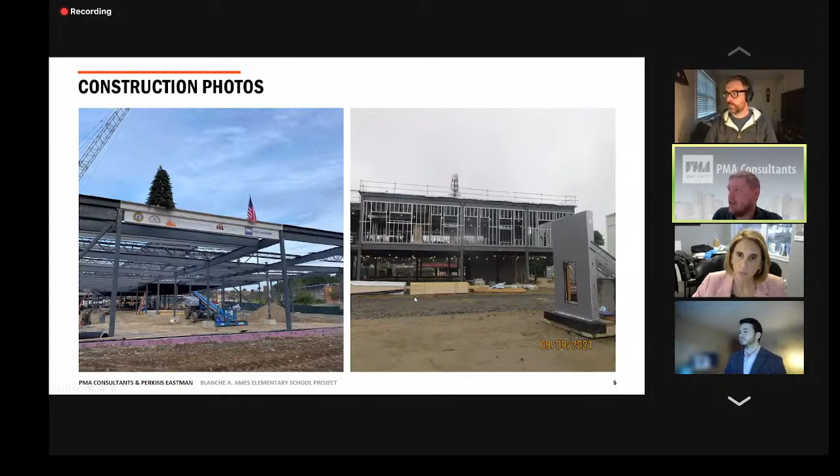On the right you'll see a picture of the most progressed building, what we call Building E, the southwest corner, where the pre-K on the first floor will be held. You'll see the exterior metal framing starting to go up, openings for the large horizontal windows, and on the right-hand side, the beginning of the mock-up wall, where the contractor puts together pieces of the building to see all the connections and make sure the details work together before going on the building.

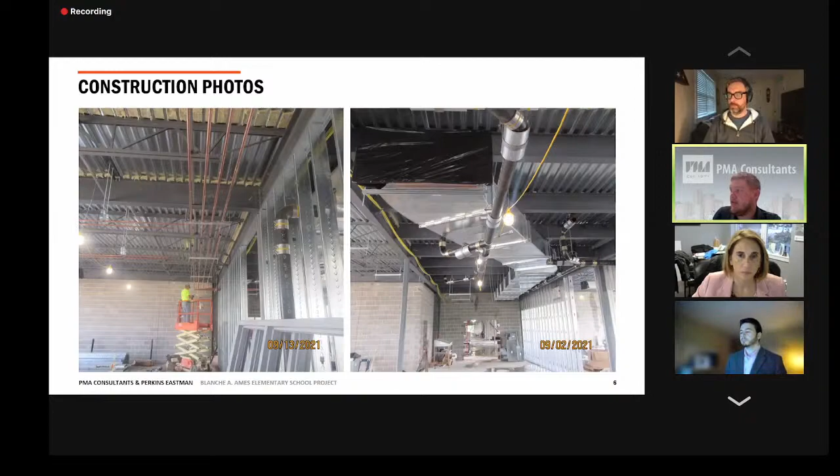Moving into the building, this is standing in E building. You'll see hot and cold water piping for the mechanical units traveling around the second floor. You also see the ductwork and roof drain piping - the large ductwork on the right, and the roof drain piping taking all the water collected on the roof through the drains into our underground infiltration systems located around the building.

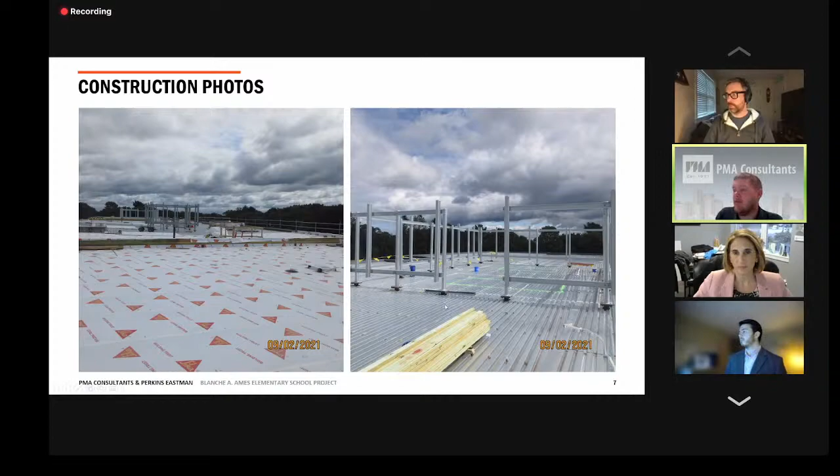These are just filtering the water to the roof drain piping you saw. You'll see in both pictures some framing - that's actually our mechanical screens. We'll have exterior panels around those covering the mechanical screen, easing what I like to call an eyesore of seeing the mechanical units. Some people like to see them, but they'll be hidden, and they'll also help reduce the noise level from those units.

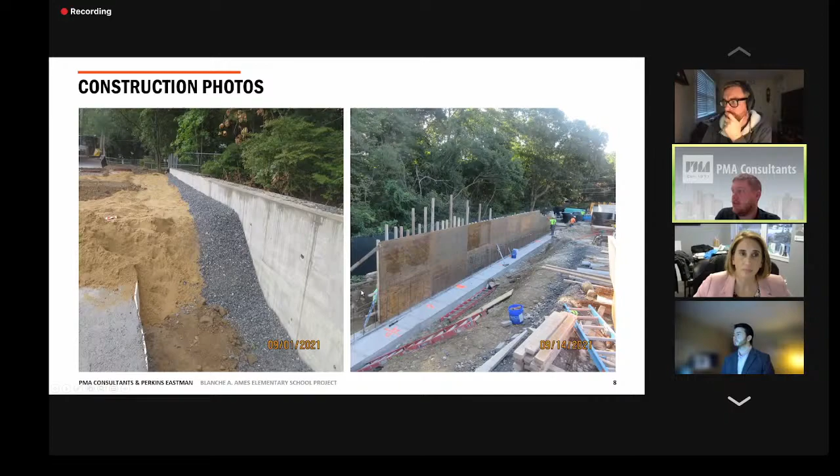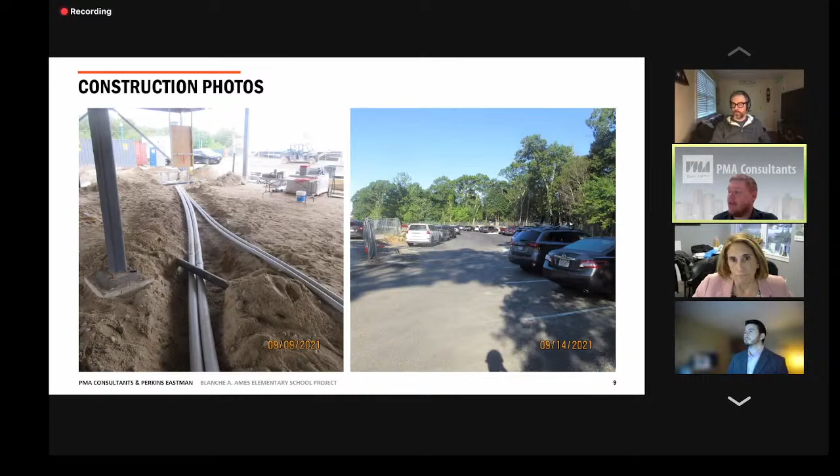On the right-hand side, you'll see the new and improved parking lot, one of the parking areas being utilized right now by the Parkview School. It's full, in use every day. It has binder and a final coat on it, and is in use and line striped, and has been working great.

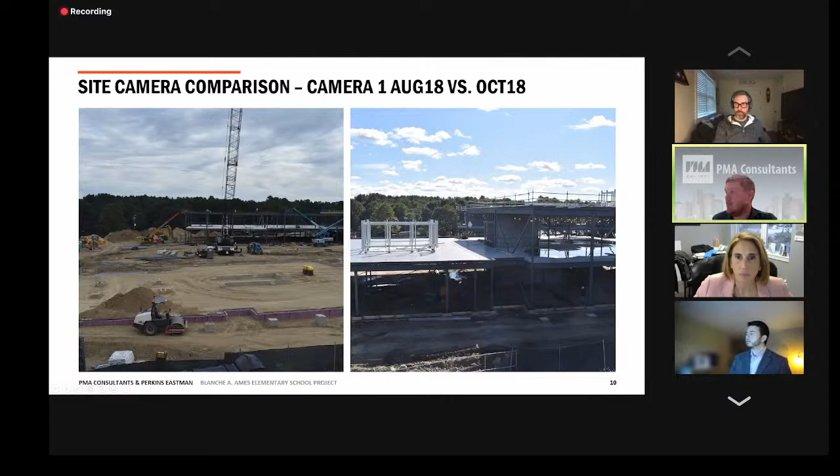That is where the central admin would be housed. On the left-hand side, you'll see C building, which you can see in the previous picture - no concrete poured anywhere. On the right-hand side, you'll see slabs on deck on both the second floor and slab on grade on the first floor, so making a lot of progress there. I believe we're working backwards towards B building, further away up in that picture, and that was actually poured today.

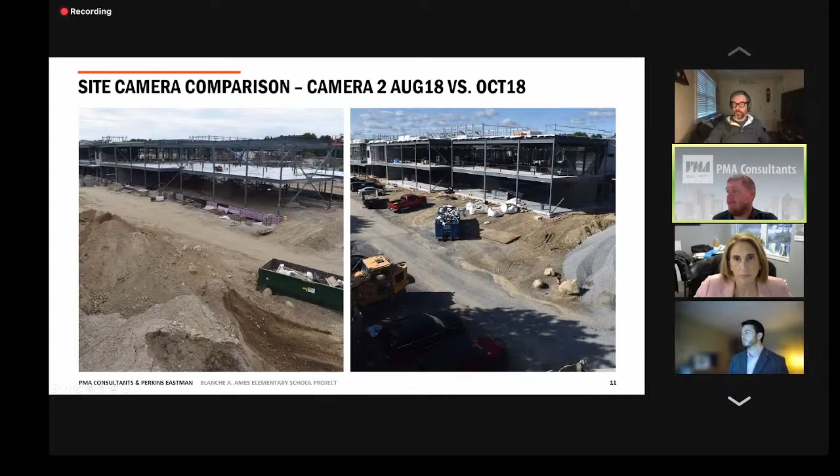The final camera comparison angle is B building, and you can see that the sheathing has progressed. Those are all the punch-outs for the windows, so a lot of natural light getting into the building. Moving right around the building, you can see the safety rails up on top for safe roof access, and the site is just getting extremely busy right now. The guys in the picture are actually working on blocking out for those window openings.

I believe that is the construction progress update. Happy to take any questions if anyone has any on the construction.

Just if you have questions, just talk, because I can't see everyone - both of my screens are taken up. Sorry.

Walter, how are we doing on the schedule? I assume we're okay. Yep, so right now PMA just completed our September schedule update, and that was dated October 1st. So it was the September schedule update, dated October 1st.

Chad, correct me if I'm wrong - the schedule went back accepted with some conditions. We did see a little bit of slippage, but that did not mean there was any slippage as to the substantial completion date. Brait has been targeting an earlier substantial completion date - internally, a lot of contractors do that. But the substantial completion date of October 14th for the building for phase 1 is still on schedule.

Chad, anything to add on that? Sure, they're still tracking early on substantial completion. They're a couple months early, but not as early as they once were. When they first submitted their schedule, they were looking at a June substantial completion - they're a bit later than that now. So I think the hope Brait had for completion next summer is dwindling, if not gone, but we're still in good shape as far as the contractual substantial completion date and the dates this committee had previously approved.

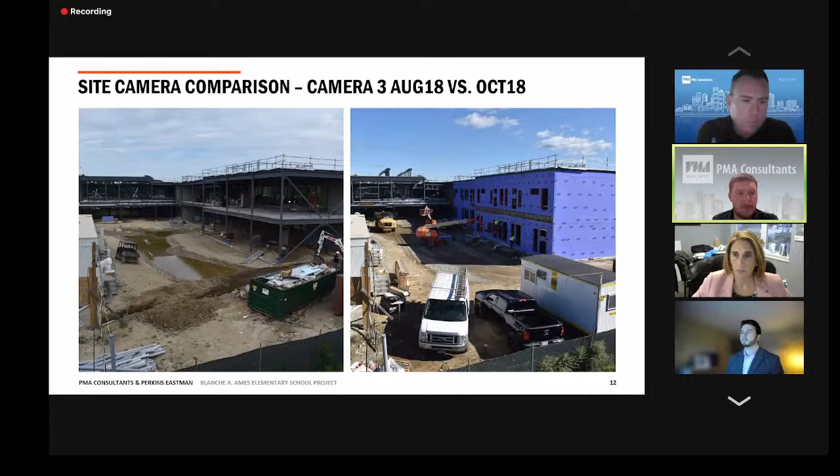So if there's no other questions on the progress update, we will jump right ahead to the wastewater treatment plant septic load test, which was completed in early September. I'll turn it over to Dan and Perkins' team for a quick update on this.

I got an extensive, lengthy email today from Stantec about this because they're finishing up their calculations. I know you'd all love me to read this long email to you, but I'm not going to. It basically says, in a nutshell, that the septic field we have right now is adequate.

So we do not need to make the field any larger. We will have to remove 2 of the trenches in order to get one of the roads in, and that is also okay to do—the field will still be adequate even after we remove those 2 trenches. They're wrapping up their work right now, but this is good news because we actually have field expansion under the base bid.

So we're going to be processing a credit change order to remove that work because it is unnecessary. At the end of this, we will have a new full permit for the whole site that will update from the 1995 permit that's out there right now. Right now you're on a temporary, but the hope is that we will be able to get a full permit for the whole site and wrap this up. It looks like we're on the way there and in very good shape right now. So very good news.

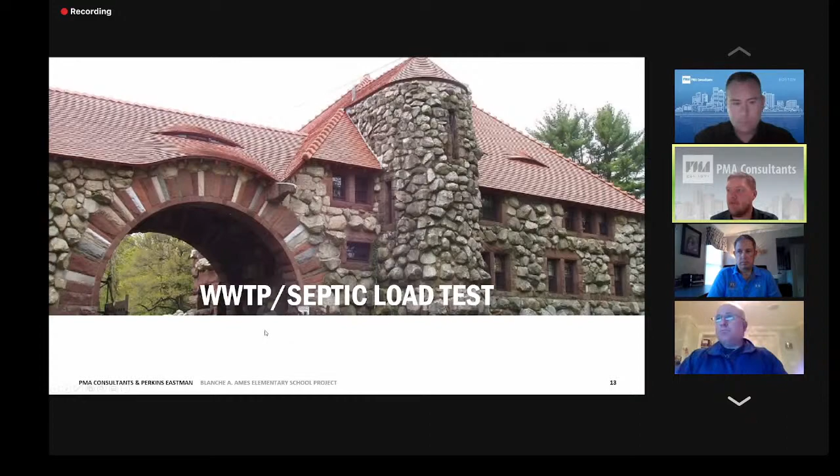All right. That's some good news for the committee, and obviously we'll keep an eye on that as we move through the project. We'll give an update, probably during our November meeting, and then progress towards getting that permit and approval from DEP in writing so we can move forward with the change order.

Next item, we spoke a little bit about some of the difficulties, specifically the roof and what's going on there. About a week and a half ago, PMA and Perkins Eastman were made aware that the roofing membrane is not available and has an unknown availability. This is a product from Sarnafil, the G410—that's the unavailable one. It's the 80 mil thickness product.

It's the product that this committee was offered the 30-year warranty on. I think the PCO was for about $16,000. It was approved to move forward with it because the 72 mil product was not available. Unfortunately, the time came and gone when this material was supposed to be on site.

It did not arrive, and Sarnafil and the roofing subcontractor reached out to Brait and advised everyone that they do not have an estimated time of delivery. They don't know when the material is coming in. Sarnafil, Titan Roofing, and Brait Builders stepped up to the plate here and have worked pretty hard to get a product substitution.

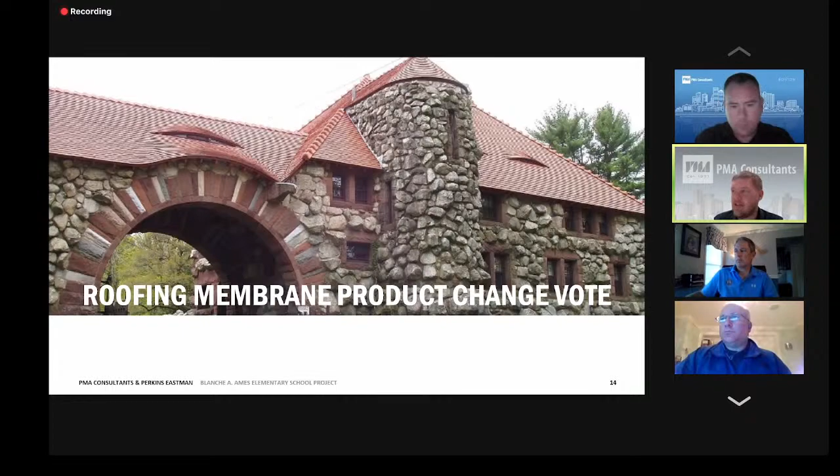I don't know that we'd call it a product substitution because we're not actually changing the material itself. The composition of the material, how it's going to act on the building, will still be the same. But Perkins Eastman and PMA have run through it—we've gotten the following letter. This was a 2-page letter that we received comparing the two products. Very minimal differences. The warranties would stay the same.

I'll have Dan speak to any type of the one tear strength difference that is noted in here, but the assemblies are all going to be the same. We received that letter today from Brait and Titan, and really it's a product change due to availability that's being requested. I think PMA and Perkins can both say that we would recommend moving forward to make sure we can get this building weather tight. Dan, Perkins, I'll let you guys speak to anything else you want to on this product and proposal.

Primary difference between the two products is the scrim, the reinforcement, and the actual membrane itself. The one that we specified is a fiberglass scrim, which is the component that is not going to be available until potentially the beginning of the year, if not into the spring. The polyester is the one that is available, and that's what they're proposing we substitute, or use as a design change here.

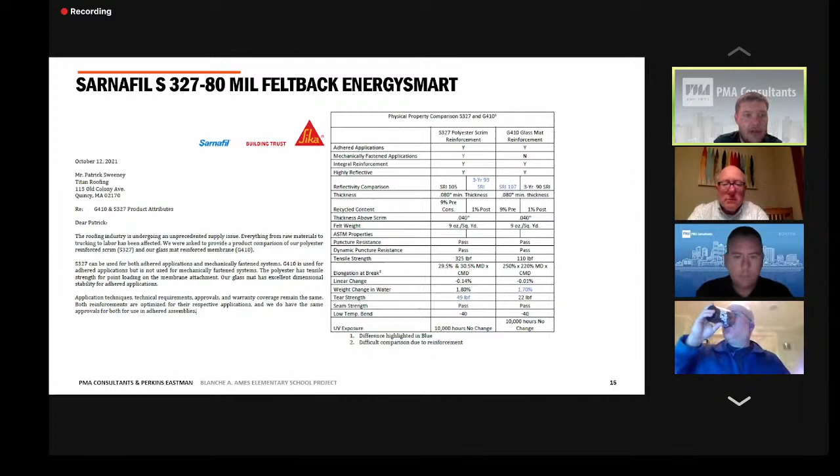It's really between those two to ensure the installation is correct, and then the building envelope commissioning agent will also do an IR scan. That'll look for any type of imperfections, and they'll be required to fix those too. It's almost - I don't want to say belts and suspenders, but we definitely need both - two independent ways to ensure the roof is good for the owner. We'll do the IR scan, and we'll have periodic reviews from both the architect and the commissioning agents to ensure the installation's going on as per the drawings and specifications.

Just to add one other comment, we do have Sika Sarnafil on some of our other schools and we're familiar with them. Exactly what Dan said, they won't give you the warranty until they come out and actually check the entire roofing system out, so it has to meet their specifications. I would agree with that.

That's on Titan and Brait to ensure those go down properly on their end, and then on the other end we have the commissioning agent working through the MSBA to double check all that stuff too. So if there was a challenge, it would just be to dumb it down. There might be a punch list that goes back to those two to fix or update whatever it might be.

You got it. Yep, okay. That's right, nice, I got one right. All right.

So if there's no more questions, I'll let Alicia. I think we're looking for a vote from this committee to approve Perkins Eastman to review the product substitution and get that ready for Brait.

Okay, Jackie's back, so she's going to take this. Perfect, thank you. So Walter, just want to make sure—we are voting to allow you to review the product substitution of the roofing material to the polyester reinforced scrim S327. Is that how you want it worded? I would say committee voting to approve the product substitution of the G410 glass mat to the S327 Feltback. Okay, so what Walter said, do I have a motion?

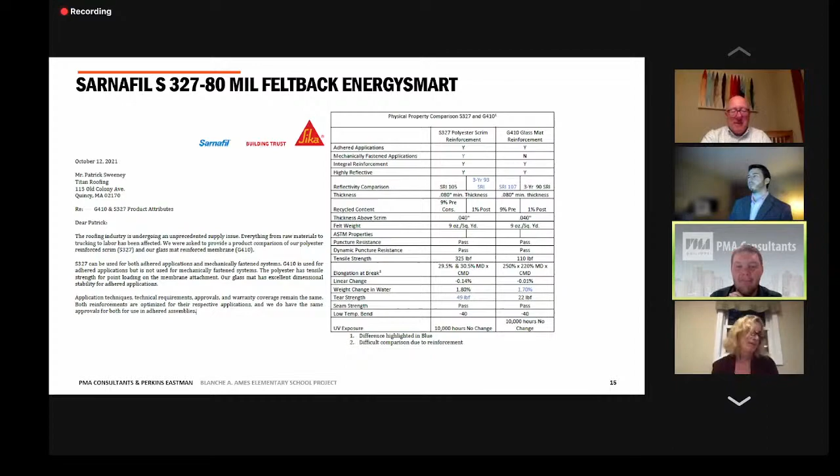We are going to get this over to them as quickly as we can. We'll likely get an email over to them by the end of this meeting. Chad is typing it now, so they will have an approval to get this going tomorrow morning. Yep, thank you. No, we don't want to do this again. Okay, one second.

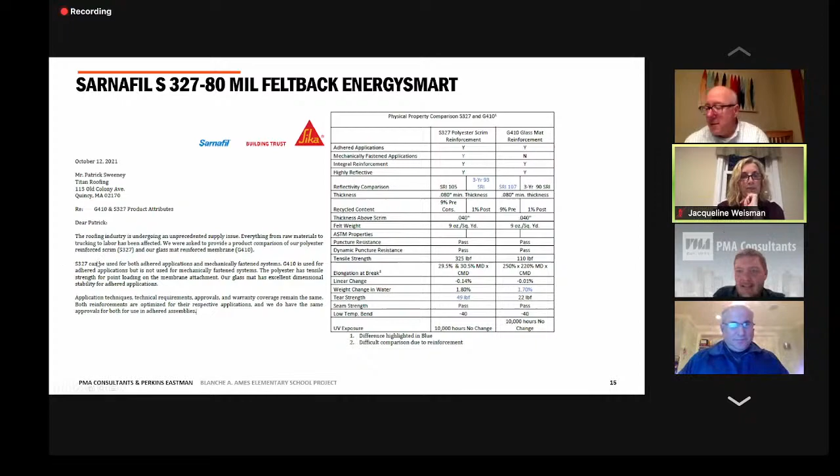Jump to the next item, cash flow update. So through the month of September, 22.7 million spent to date. MSBA reimbursement of 6.75. I didn't put the number in on pending MSBA audit because we do not have a pay app in with them right now, but there's about $10 million going into the MSBA for reimbursement review within the next week or sooner. So right on target right now.

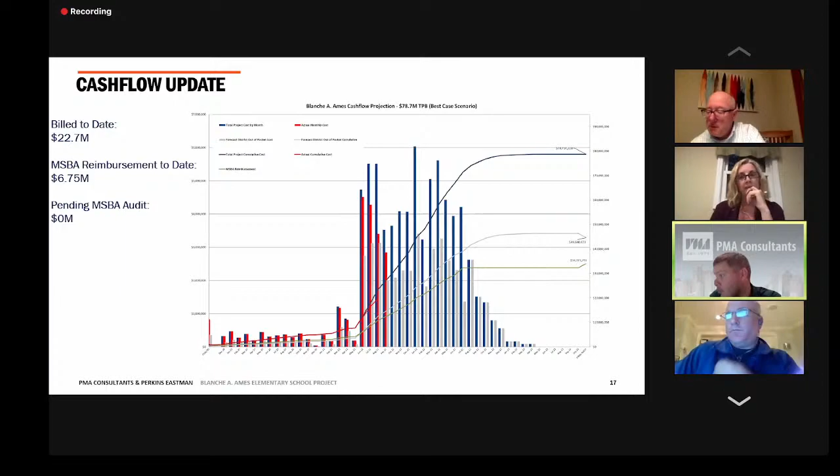We were a little low in August, and I think that's pretty much reflected in July too. What we see in the schedule is reflective of the cash flow. It just means we're obviously keeping an eye on the budget as well as we're moving through—you can kind of see it in both lights.

Construction look ahead: we have very little structural steel detailing left, and very minimal punch list, which is great. The only difficult thing is the structural steel company has kind of demobbed, so they're back every so often to finish up a handful of items, but we're working through that. We're going to complete the underground MEP installations in the C&A building—those are the only two slabs we have left to pour. The second floor is completely decked or poured with concrete, and then we have two areas left: the cafeteria, the main lobby, the gymnasium, and then C building.

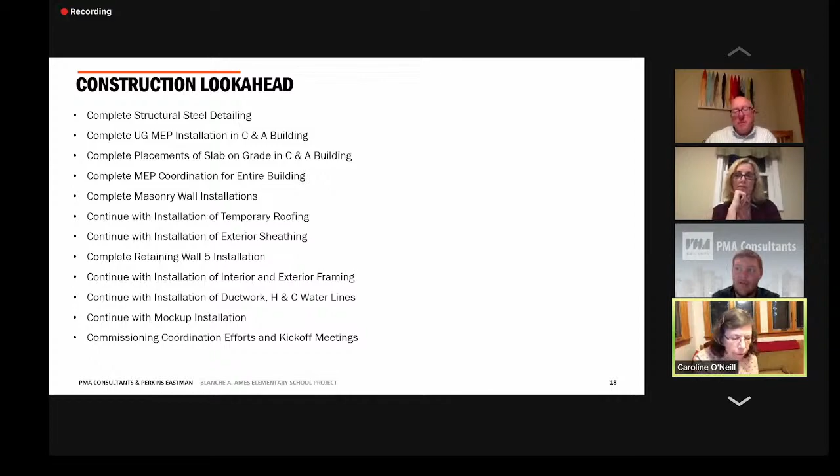We're going to continue to complete the MEP coordination in the building. One of the tasks Brate's been working through, building by building, is ensuring mechanical trades don't clash—plumbing not running into ductwork, not running into fire protection, not running into electrical. Usually the largest goes first, up high—that's ductwork, in coordination with fire protection which needs pitch—then plumbing follows, and then electrical follows. They're working through this, I believe out in the C building at this point, but that's first, second, and underground.

So they're working through there. We're likely going to be done with masonry, CMU block masonry, in the next few weeks. So that's great, we won't have any winter weather to contend with for that type of masonry.

Going to continue installation of the temporary roof. Right now we're about halfway through the building, so they'll continue that installation. Also continuing the exterior framing in combination with the exterior sheathing. As you drive by the building, you'll see that purple EXP gyp board going up. That's an exterior product that gets hung and screwed into the metal framing. That'll continue right around the building.

Retaining wall 5 is complete. They just have some backfilling that they need to get done over there, so we'll be able to get some additional parking on site, which is really going to help, because in the next few months we're going to jump from about 60 guys on site to probably close to 100 plus, and it's going to get real busy on site, which is great, but it's just going to be congested.

So continue with installation of interior and exterior framing. We're moving through the building and topping off in areas.

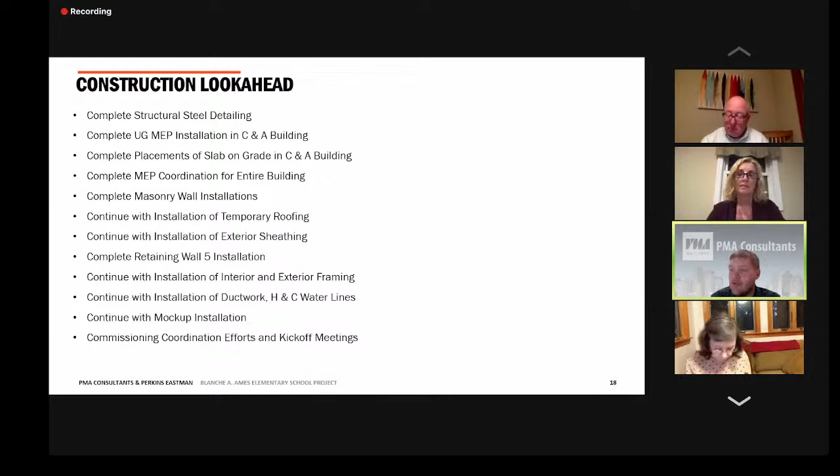So quick contingency update. We are almost 30% of the time elapsed through the project, so 30% through the schedule. Construction contingency, as you all remember, was about $3.74 million. That does not include the bid savings; we did not put that in here to track against.

At this point in time, 2 change orders have been executed, and we have pending approved change orders of about $45,000. Those 2 change orders total almost $75,000. We have exposure of about $761,000.

A lot of that current exposure is due to an unforeseen condition on the eastern side of the site. I think you all remember we talked about it, we've shown a lot of pictures. That work's complete, and we actually did finally get the pricing on that. So about $353,000 of that current exposure is from that underground unforeseen condition. What you'll see at the next update is about half of that is going to move up to the pending change orders or change orders approved.

Again, we'll reiterate that does not mean that PMA is in agreement that the town owes that much money on change orders. We are constantly reviewing and working through it. So we have, I would say, anywhere from 10 to 15 potential or pending change orders out there right now that are in review in some form or another, that have either been sent back for revisions because they included incorrect pricing, markup, or hours. But we are reviewing those on a daily basis with Bree and making sure we get through them.